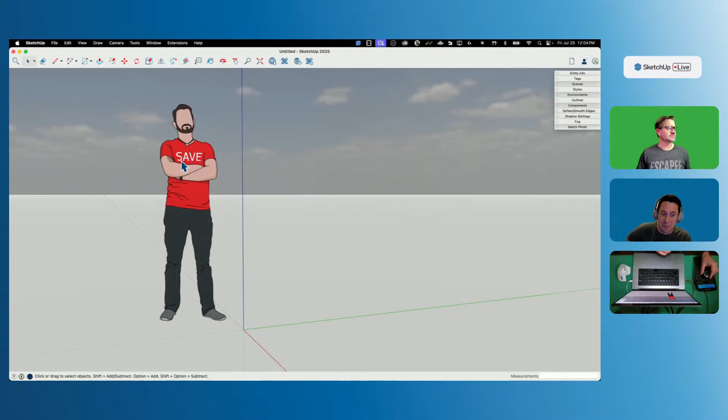Make sure I turn everything on so everybody can see. This question always comes up at the top of every modeling session: the mouse that Aaron is using, where we get all of our fancy camera work inside of SketchUp, is a 3D Connexion SpaceMouse. If you haven't seen them or tried them, go check them out because it's highly recommended with SketchUp. It makes modeling so much fun, unless you're just starting to use them like I am, and it makes modeling very frustrating. But apparently once you get used to them, they're great. There is an investment in time for sure. So to answer that question ahead of time, it's a 3D Connexion SpaceMouse. There you go.

All right, boy, we're talkative out here today. This is pretty nice. I know, it's so great. Can you explain renderings?

Rendering is when the computer simulates light to put it onto 3D modeled surfaces to make it look more lifelike. That would be my explanation of rendering. Which we are probably going to do today, right? Because Herbie is metal, we may or may not add some photoreal materials. Yeah, we'll definitely do that.

All right, so I'm going to bring in a couple of images that I got. The first one is an image I took at the movie theater when I saw this movie last night.

Speaking of which, if you guys have seen Fantastic Four already, because I know it's been out since yesterday, what'd you think? Let us know in the comments because we're going to talk about it. We're going to try to be spoiler free, try not to spoil it for anybody because it literally is like the opening weekend. I hate that, I hate it. In fact, that's why I go see movies I'm interested in so early, because I try to get ahead of the spoilers.

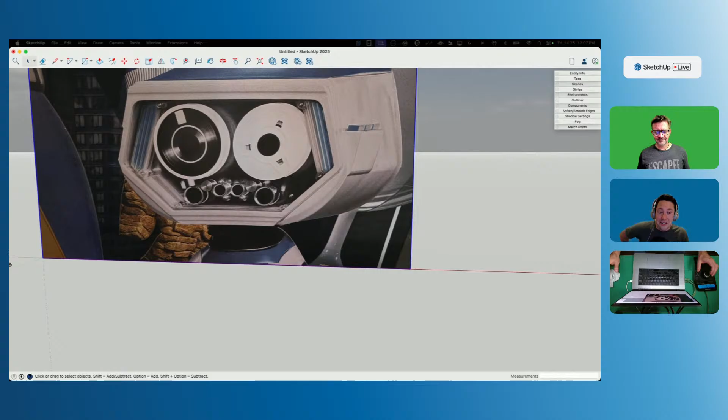Well, I think it's funny, especially with comic book movies, because I know people are not as geeky as me, so they probably haven't read the comic books or don't understand the implications of a lot of Easter eggs that they tend to put in comic book movies. True.

Oh man, Proton Man lost his foot in that one battle, but nobody knows who Proton Man is, so they don't care. Yeah, you got to get yourself a good movie buddy who's as geeky as you are, then you can go after that kind of stuff. It's like Mystery Science Theater 3000. Whenever I go out with geeky friends and watch movies, it's a grand old time.

So we looked at a couple things. I was originally thinking about the rocket, but it's actually pretty simple, some swooping shapes, but it wouldn't take hours to model. Donovan mentioned their car, and that would be much more than 2 hours, again lots of swooping shapes. The whole movie is set in this retro futuristic style with a heavy 50s vibe but super sci-fi stuff going on. Really cool, but there's not many straight surfaces, everything is rounded and curved.

Herbie's a good example of this. His face is flat, but the rest of his head kind of rounds all the corners and stuff like that. So it's gonna be cool, a fun little model. We're gonna hop in and get started with this.

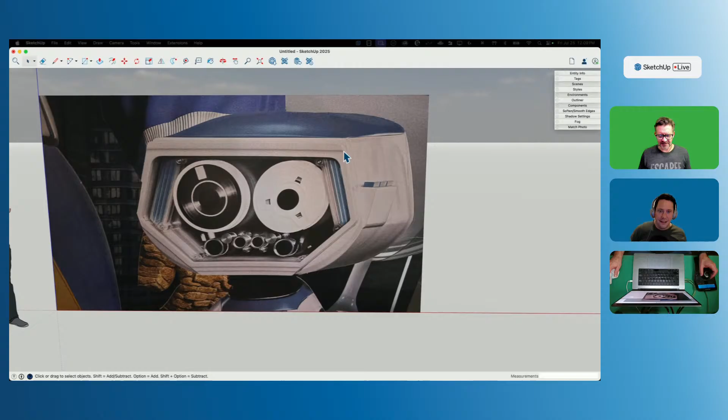I don't want to get too far down the rabbit hole into how he actually works, stuff they talk about in the movie. But what I really want to do is model three main pieces. This faceplate is on the outside of his head. This tape looking thing, like reel to reel inside, is actually a separate piece that sits inside. And the case of his head is another piece. If we have time, we'll do this little accordion joint down here for his neck, but those are the three main pieces I want to build out.

So I figured I'd start with this faceplate and set the scale and size, and then we'll work our way backwards to this reel-to-reel setup.

I'm glad I got this picture because it's a very good picture of what happened. So right here, this reel feeds under this piece, up over this, under this, to this, like that, and you can kind of see the tape right there. I thought that'll be a fun thing to model, how those pieces all go together.

Going to be some cool stuff. I don't have a whole lot of plans for a lot of extensions, I think most of this is going to be native, but we do have a couple curves that I might lean into, like the top of his head in particular. It kind of comes flat on these two corners and then bubbles up.

This is the danger of becoming a SketchUp modeler. I was watching the movie thinking, that's soap, skin, and bubble right there. That's just an extrusion, that's just a push pull. I was literally doing that during the movie in my head.

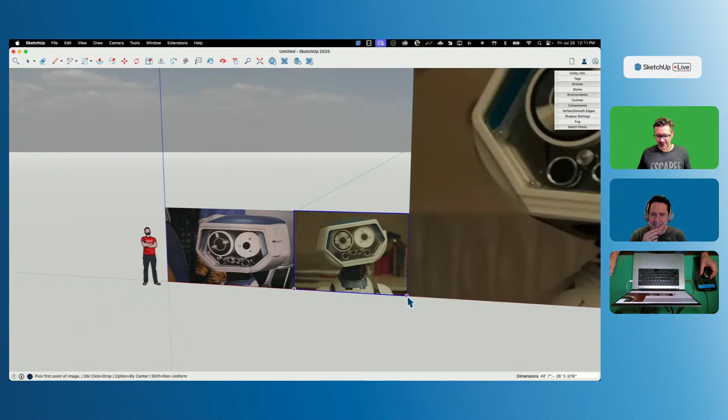We know that there are many people within the Hollywood complex that use SketchUp, so it makes me wonder, did somebody use SketchUp to create this? Because it's like an actual puppet, right? Yeah, he's all practical. Super cool for me. It does make me wonder if someone just so happened to have made Herbie in SketchUp and we're just reversing the process that they created before they made the movie. Who knows? If this hits anybody in the production crew downstream, let us know.

Kagi said Aaron never used to use materials, but now he uses PBR materials all the time because they're so good. But would he have started using materials more without PBR ones? Well, let me put it this way: y'all have been harassing me to use more materials for years, and I just started using them with 25. I think it's the reflectivity, as soon as that came in, I really started getting more into using that. So yeah, absolutely, 100%.

All right, so I want to start with, and I don't have a good flat shape, I don't have any technical drawings of this or anything like that, so I might be a little off on some of my sizes here. I want to come in and use this head right here as a reference, whoa, look at that. Boom, he is totally facing the camera perfectly, that's crazy. Find the middle of that, draw that down. Wow, that's pretty close to perfect too. A little weirded out.

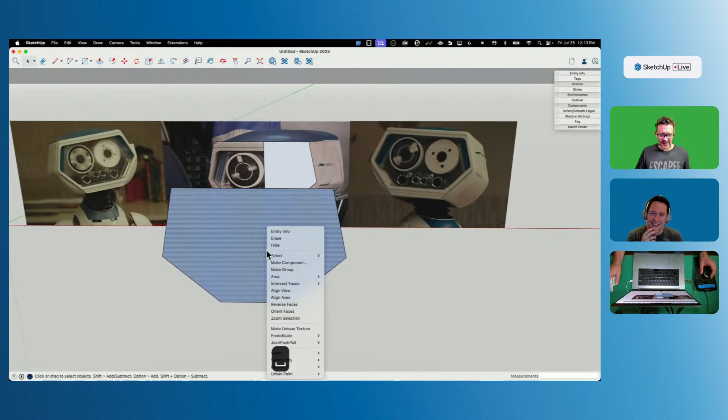All right, so that's about what his face looks like. That's the shape we'll go off of. If we look in here, this cover has multiple levels. Looks like I got it up here, drops down to a lip that sticks up, curves in, comes down here, steps down, steps down. Okay, so that's what we got going on there.

I'm just going to draw a couple reference lines on here for myself. Like that, and then up here goes up like that. I think that's the end of it. So we'll do this, it's that top lip. And then all of this is going to offset in something like that. I'm going to have some rounded corners on here.

I can see that this corner down here doesn't look rounded at all. This one has a small arc, and this one has a much bigger arc. So I'll do one like this, double click over here, then do a different, smaller arc here, and double click over here. All right, then we got that basic look now.

So I'm going to pull this first one out that far. This one's going to come out that far, and again this one's going to come out this far. If I want the same offset as here, I can select this face, hit push pull, and say come out from here to here. So I can use that offset as a reference right there, like that.

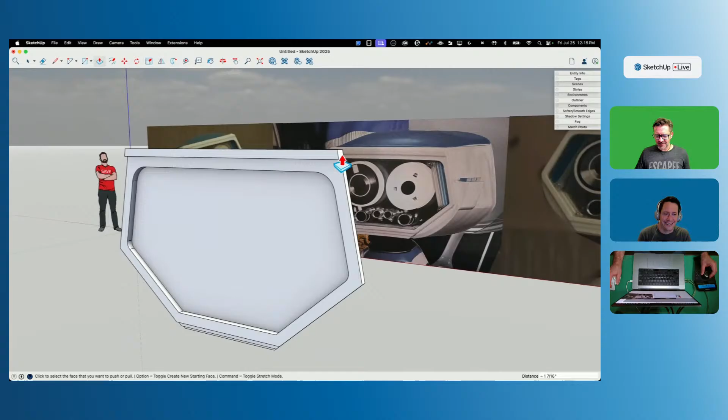All right, so this little lip that sticks up here, it is rounded off. So the outside corners are rounded here and here also, not quite as much. So I'm just going to come in here, double click like that, and then do the same thing.

Oh no. I'm never sure why sometimes I'm able to double click and sometimes not. Maybe it's because it's not flat. That's why. So if I do an offset like that on a flat piece, then it lets me double click on the next one and get the same offset.

All right, one more arc right here. What I was doing up there is I just found the end of that and came straight across, inferencing it right across. That way if I click there, go up there and get magenta, it's the same exact arc.

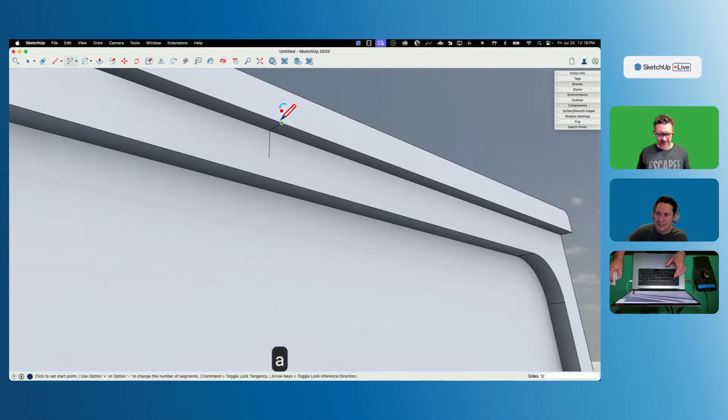I think I saw, I don't know if Ty's on. Ty asked me if we could model this ahead of time a little bit and then 3D print it beforehand, so we'd have a cool 3D print thing to show. I thought that was a cool idea, but this is the first time I've thought about how to model this, so that would be cool. I see Colin on, haven't seen Ty chime in yet. Ty, if you're here, say hi. I apologize to Ty for not getting back to him on that earlier, but as is indicative of my week, the reason I couldn't do it is because I didn't have the time.

All right, so I'm just running these long like this, and then I just have to chop this off at that angle. Whoops! I want to cut this off at the angle here. And this is just a straight angle like that, not a curve or anything.

So really all I should have to do is connect this point to this point. That'll give me a face right there. If I select that and say intersect face with model, that'll break the curve right there. So then all I have to do is select this and delete it. And there we go, we got a nice smooth.

You make it look so easy. It's my goal, try to find the easiest way to do stuff. Sometimes on those days that stuff doesn't go smoothly, that's me learning myself how there's a better way than what I'm doing.

Transom chimed in and said, 'We're making the interior millwork for a local restaurant and a bar in the shop.'

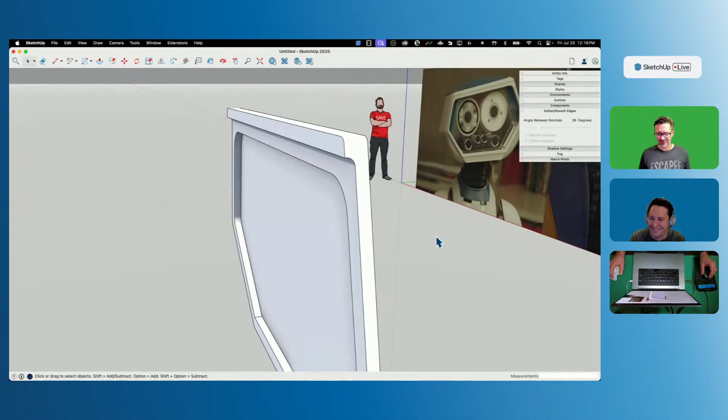Mike planned the whole project in SketchUp. I'm doing a lot of sanding. Ooh, sorry to hear that. He also said sanding's been bad. It's just not making fun.

Church fixtures too. Got a new CNC machine with a 5 foot by 10 foot bed. Oh my gosh, that is ginormous. That is a lot. All right, I got a thing I'm not happy about.

My offset - this is too thick. This bezel's too thick. It should be much thinner.

So I'm going to run around the outside like this, just pick each of these pieces that go around the edge. I'm just gonna do a quick offset, offset that, bring it down. That actually might be enough. Let's see. Back.

That's much closer. So it looks like these down here are supposed to be about the same size. So I definitely shorted myself here a little bit. So I'm thinking what I'll do is something like this.

Run this down just a little bit further like this. I promise I'm not going for perfection here, I'm just looking at my initial setup and not loving what I'm seeing. Oh, I gotta undo that too. Undo. All right, so I'm gonna take all of these guys.

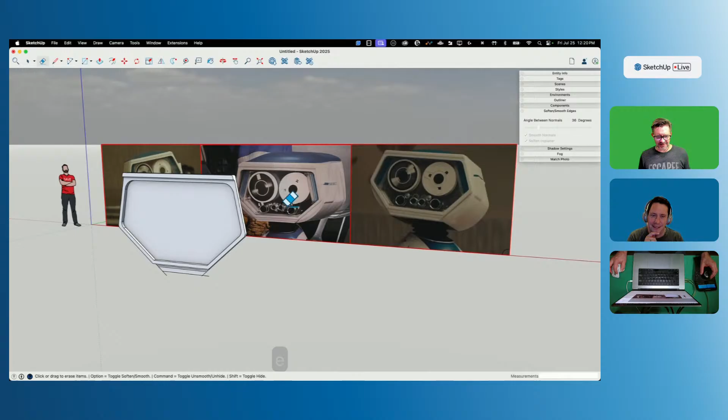What is that? I'm gonna make it a group. I'm gonna right click and lock it, that way I can't accidentally erase and get rid of it. Little time saver - I just erased that instead.

All right, looks like you didn't lock that part of the model in. Nope. All right, so get rid of that, get rid of these. Then what I really want is just this length right here. So what I can do is take this, put that here, put one here, and that way I can just run a line across like that, and then those are my steps down below.

And then for pulling this back up, this right here, if I take this and divide that into 3, then I know this one comes up to the second one, and this one will come up to that first one, and now that's evenly divided into the same size step. So that looks much closer to what we had there.

Cool, Randy says no disassemble. Hey, Johnny 5 would be a fun one to model too. Oh wait, you've never done that one before? Not like as of yet. That would seem like low hanging fruit for a SketchUp modeler to go in and do Johnny 5. That would be a fun one for sure. Well, I guess we know what to add to our recommendation list.

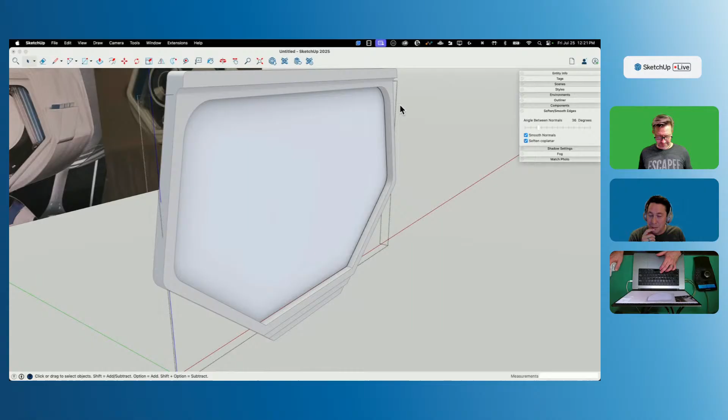All right, I'm gonna start getting some materials on here. That's right, we're doing it this early, guys. Glass. I just put a... So I grabbed this middle piece and made it its own piece, and then we'll take this piece out here and make it into its own group.

And one thing that's happening right now is my background is kind of bluish, so my ambient light that's coming in is kind of turning this kind of blue right here. I think I'm going to try to go with a more bright white, or maybe even a slightly orangish - see, these guys got a little bit of an orange or yellow tint to it.

So I'm going to real quickly just go to my environment - is there presets for 1970 sepia? No, but this one looks pretty close. Got a little bit of warmth right here, but it's definitely more yellow. The other one was pretty blue.

At this point, I'm not concerned about the background because I'm not going to use that. I'm just moving my colors off on the other screen. I'm not going to use the background, so one of the things I can do is go to edit, and I can just turn off the sky dome.

Now, all I'm really worried about is how that... You still get the reflectivity, which is cool. I still got the reflectivity on the glass, on that transparent part. So this looks pretty cool. I kind of like this. It gives me a little bit more warmth as opposed to that coolness. And I am intersecting. That looks pretty cool.

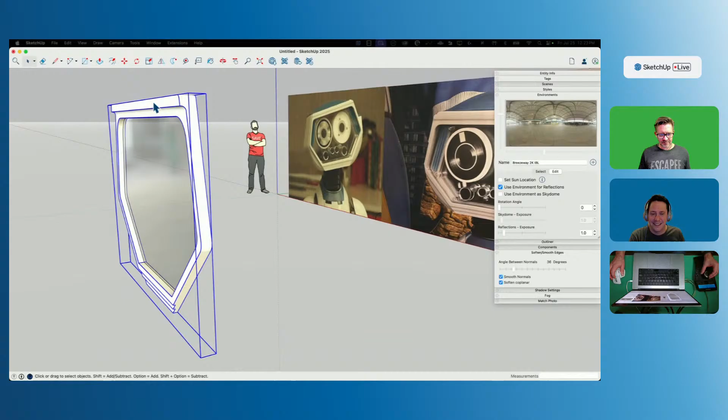So right now, this glass fits directly in here. I don't have to do this next part, but I'm gonna take that and I'm gonna scale it uniformly, just a teeny bit, just like that much.

And then I'm gonna take this because it should be a solid, and this should be a solid. That's not a solid. Let's see why it's not a solid real quick. Tools. Nope, tools, wrong one. Solid inspector.

Got a stray edge and a reverse face, so I'll fix both those. And then what I'm going to do is take this one and use tools, solid tools, trim. Trim says cut this out of another shape, but don't throw away the cutter. Subtract says take this out of this and then throw the cutter away along with the difference. By doing that, what I create is what I should have created.

Something didn't go right in there. Missing a piece or two. But yeah, it is a piece of glass, and then I want that to fit into the lip of the plastic here. But for some reason it didn't do that, and I don't know why.

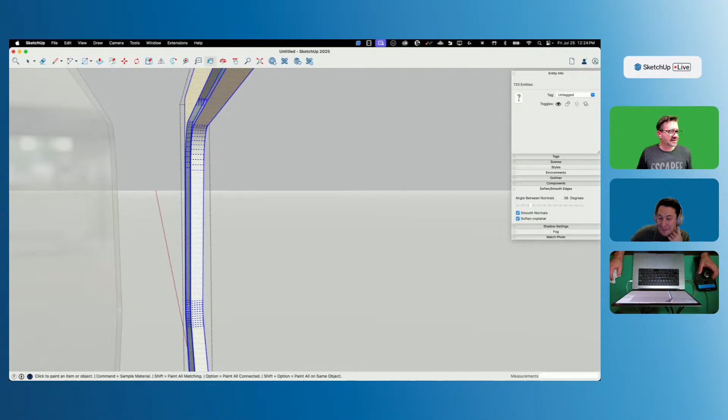I was about to ask why, Aaron. Why didn't it do it? But you just answered my comment. You don't know either. I don't know. Let's find out why. Oh, maybe it did. Oh, no, I'm sorry. It did. It just colored it clear. That's all.

All right. So now I can take that, put it back in there, click it right into place. And there we have Herbie's faceplate. Wow. So grab that, make that into its own group.

All right. Now this piece that sits behind, this is the part I'm most excited about, is doing this little reel-to-reel model. It's going to sit right behind this glass faceplate. So I can grab this face, Control C, and I can paste that.

And this will be the base that I'm going to build this all up onto. And then I'll just have that piece just fit right back behind here. Whether or not that's actually how it interacts in the real thing, I'm not really that worried. I know that that's how it will line up here.

So here's a question. If you copy and paste a component, does it turn that pasted object into a component, or does it make it unique? No, if you copy a component and make a new copy of it, that new copy will be a copy of the same component. So if you go in and edit one, it will edit the other.

Yes. So this, all I grabbed here was just a surface. So I cut it out of there. This is not part of a copy of any actual object, just a face. So I'm clear to mess this up as much as I want.

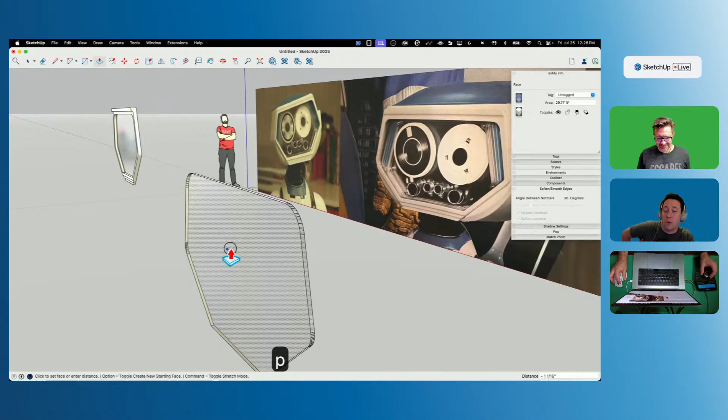But the reason why I asked is, if you put a different material on that, does it copy that material from your copy onto the original, or is the material unique? Yeah. There you go. Nope.

All right. So I'm going to do this background, and then I'm going to build everything up off of it. So I'm going to just give this a little bit of depth, just so I have a thing rather than just a face. And then I'm going to grab that and make it into a group. I want to group all this stuff together.

And then we got a couple things. So there's like an edge coming around here. You can see that has like these bolts going in, or nuts or screws or something going into it. So we'll do that. And then we have this little lip right here with a couple steps. We'll do that as well.

So let's start by grabbing this face again, Control C, coming out here, pasting it, and I'm going to put just white on here for right now. And I'm going to do a couple things.

One is I'm going to put this section here, go right there, go parallel to that, and then parallel to that. There we go. Draw that up like that. And then, to get that in the same spot, I'm just going to inference straight across to here, draw parallel to this. There we go, run that up like that. Get rid of those extra lines.

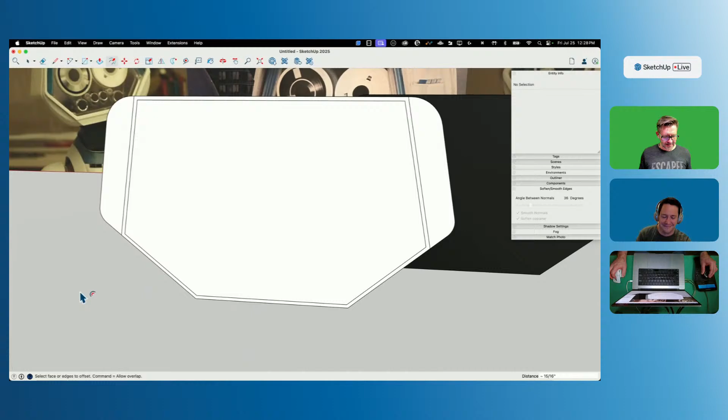And then I'll take this now and offset this ever so slightly. It's just a little lip. And then I'll come in here and I will put a circle like that big.

Actually, undo. I'm going to draw a circle, and I'm going to pay attention to what I put in. Let's say 1 inch. All right, there's a 1 inch circle. Perfect, because then I want to put that same circle right here, right here.

Like this. So that's what I want to get. I'm trying to create that plastic lip right there that goes all the way around. And then I'm just going to clean up those pieces that overlap.

Whoops, too much deleting. I think Randy gave us a suggestion on something to model. He says, how about some, I'm going to mispronounce it, Julius DeWall model trains?

Do you know what that is? I don't know what that is. I don't know what that is either. I can't say yes or no because I can look it up. Hold on, I'll throw this out to the crowd.

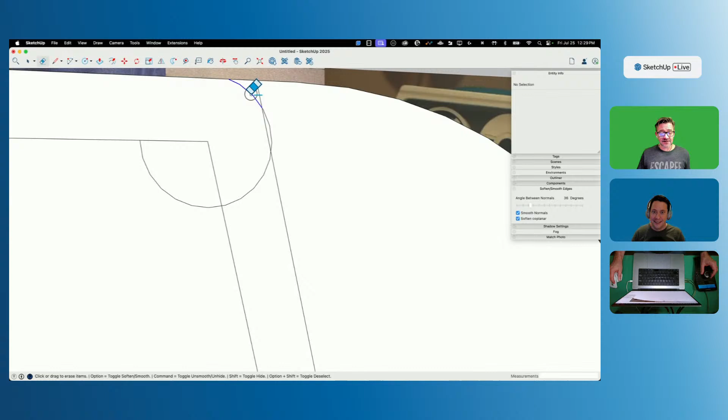It's been a bit, I'm going to tell you guys, I have seen quite a few movies the last couple weeks. I did see Superman when that came out. This week I saw both Eddington and Fantastic Four, both of which I thought were just great movies in very, very different ways. But what about you guys? Anybody seen any good movies recently that are worth checking out?

Okay, coming back to the comment before, the Julius DeWall model trains. If you Google it and look at images, I swear these were all done in SketchUp. The engineering - do they share the files? Can we just download them? And I know it, they look like SketchUp models. They really do. Wow, interesting, very very shiny trains. A lot of gold, a lot of silver. Very shiny.

That's fun. So let's expound on your comment earlier, Aaron. You saw them both, you liked them both for different reasons. You want to expound on that a little bit? Yeah, I thought they were both fun movies. I think an issue that's coming up - I don't want to get too high and mighty here, but let me tell you what's wrong with the comic book movie industry right now.

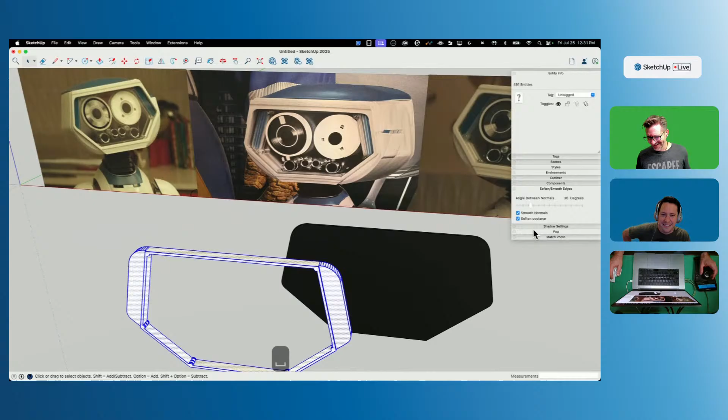Help solve it for us, Aaron. Let's get it, I get it. It's a multi-billion-dollar industry, and I understand that. But man, it's just the fun's gone. You know, it's all just so serious, and I am loving that both of these movies were just very, very fun movies. So I really like that. I liked that this was a good time. I had enjoyed both movies very, very much.

For different reasons, but they both were like, you know, I didn't have - it seems like the makers of these movies didn't worry about how grounded, how real is any of this stuff going to be. It's a comic book, you know. It's, and they did that, they just went, let's just have a fun comic book movie, and it was cool. It was a lot of fun. So yeah, I loved it, I thought it was amazing. Both of them, for very different movies, but both very, very fun for sure.

Bill says, well, the curves. Yeah, I didn't - I'm owning it, I didn't do that. Yeah, they'll, oh, that's kind of cool. It says that Randy's saying we're back on the trains. They come with design documents. That's pretty cool, that could be fun.

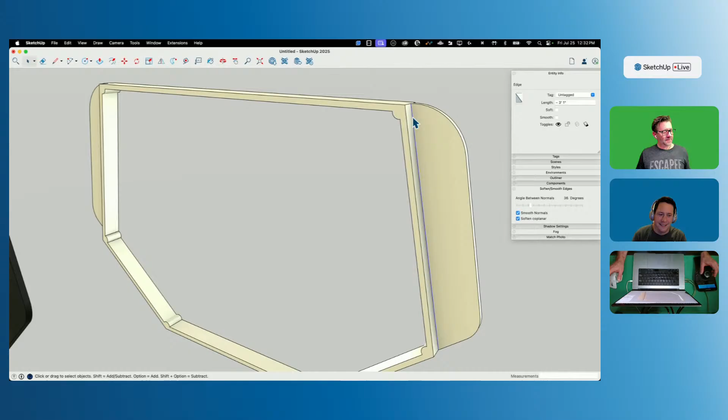All right, so here's my thought real quick. As I was just kind of modeling and talking, I'm going to take all of this and make it clear because that's kind of what happens in here. You can see that this clear plastic's in here - or not clear, and make it like this, which is like a 95% clear reflective surface. And then right here, they have kind of some material, a little bumpiness like right there, and then you can see it's see-through to a blue section behind it. These ones, you can't really get that detail.

I want to do something like that, get ribs on here, make it clear and put something blue behind. So what I'm going to do is take this line right here and go this way. We'll go from about here, option, up to here.

And I'm going to divide that, 1, 2, 3, 4, divide by 5. Yes, that's what I want. Then I'm going to get rid of my hanging over edges, and then I'm going to pull up.

Oh, something didn't quite hit. I think I got a little too fancy down here at the bottom. There we go. And then pull that up like that. Double click here, grab all that.

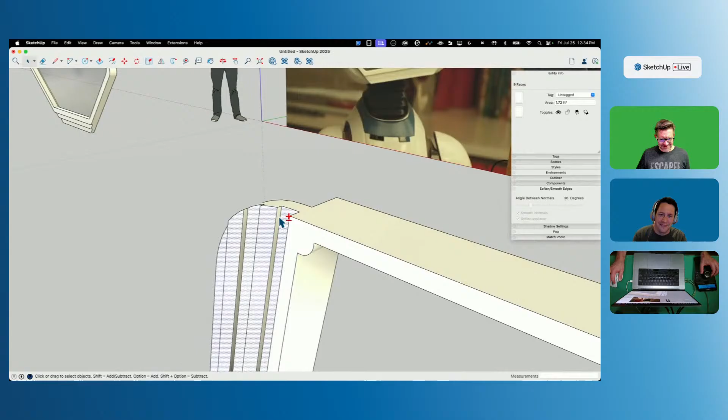So we're going to take all of that, and I'm going to mirror that, a copy of that, along the middle of this. Boom, that's over there. All right, now I'm going to take all of this and make that into a group.

And color that with the same material. All right, so they're going to have nice... oh, we came close. We got some not see-throughness here.

So what happened, interesting, is somewhere on the interior I have a material that's not see-through, so it just colored the front face. So what I can do is grab all of these and say what color do I want there. I think I can just do this.

No, I guess I can't. So what I might have to do instead is, I'm not sure, I'm playing with this right now. Oh, there. So if we look on the inside, you can see all these faces have that white.

So what I'm going to do is, I have the clear in my paint bucket, so I can just say I want to color this the clear, but I'm also going to say all the connected faces. Let's see if that's not better.

That's not better? It looks better. No? Still not seeing through. See what I'm saying? Oh, yeah.

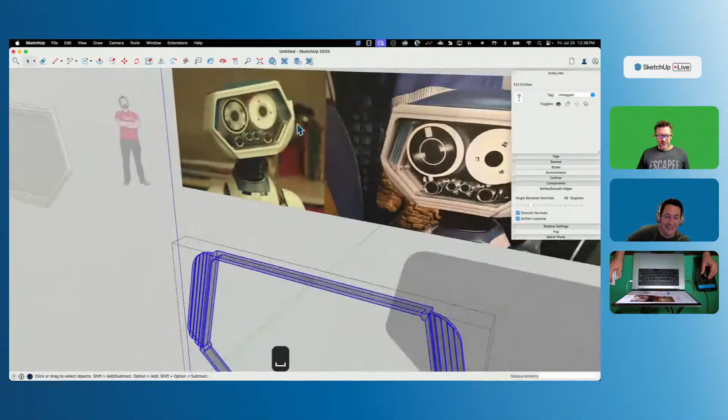Would the direction of the face have to do with that, or? Oh, I just had some. There we go, they weren't connected. The geometry over here didn't connect to the geometry over there.

Bill says trying to follow Aaron when he's on a roll is like herding cats. I'm sorry, yeah, I had to figure things out.

So I'm going to undo a whole bunch, I'm going to go back till it's all the way white. All right, so every face, regardless of the SketchUp model, every face has a front and back material.

So if I come in here right now and grab this material and say Command A to select all, and then just put that material on it, all it's doing is putting it on the outside face. So you can see right here, I can't see through this section.

So what has to happen is I have to get both the front and the back of all those faces to be clear.

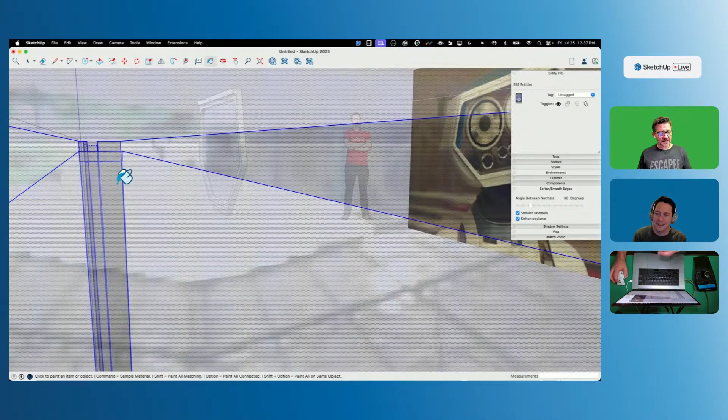With everything still selected, if I was to peek my head inside the material, scrolling in, eventually my head will pop through that surface into the lower surface. And now if I just put that on the inside, all the pieces will get that same clearness, and now it's all the way see-through.

Patrick says there's a few extra edges on the right-hand side that's not helping. Could be what? Do you have extra faces? Oh, you mean over here? This?

Top two, because I copied that over and didn't clean it up afterwards. I think I'm getting rid of geometry I need right now.

One of the downsides to working with clear materials is that they're see-through. Colin says, could you select all, reverse faces, paint, reverse faces, paint?

Let's undo, let's back this train up again. We're learning, everybody. Let me start by cleaning up. One step forward, two steps back. Here's the problem. I didn't grab the end pieces to close that up.

This is a fun one. Let's see if I grab these and just move that up to here. No, that's going to make a mess.

I guess the easiest thing is just to do this and stitch it. I'm not opposed to stitching, stitching's a good time. The way I did this, what I probably should have done is drawn a line here and here and just copy this whole wing from one side to the other. I didn't do that, so it's going to be a little bit of work to close this up properly. But then when I do that, I can get those on there. That's probably something that caused a problem.

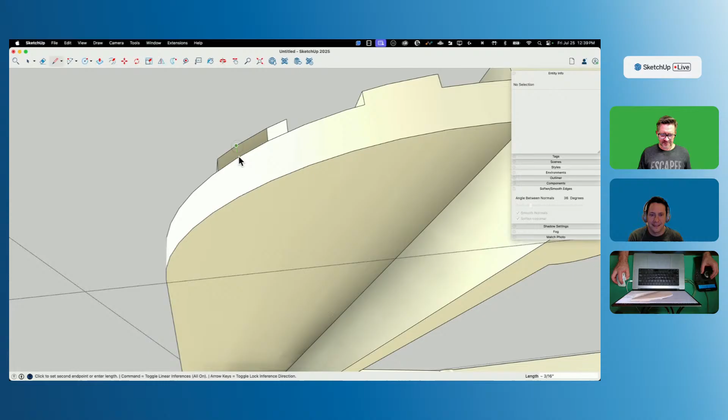Let's do exactly what Colin was saying. So it looks good all the way around. Command A—should probably save, right?

No, okay, I have to point this out. There was a comment about 20 minutes ago that somebody was like, save. And then somebody else responded like, don't kill the tension. You guys want a repeat of that horrible Notre Dame issue? I'm trying to find the comment because it was so great. What did he say? I thought you were on my team, y'all, but no, they were looking out for you. The comebacks were just too good.

All right, let's try this again. I'm gonna come in here, select all, color it. I'm gonna grab this and say color all. Now with everything still highlighted, I'm gonna say reverse faces. Boom, white outside. Color it.

Keggy said, don't spoil our fun. That's what he said. Keggy. All right, so there we go.

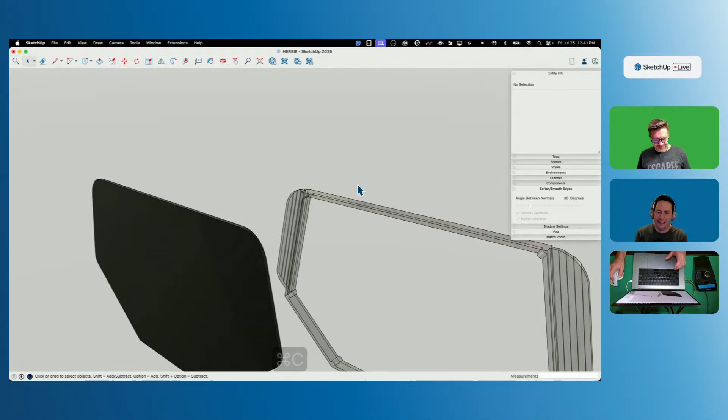So we got that. I am going to grab this piece and this piece, the back faces, and hit Command C to copy it. I'm gonna come out and say edit, paste in place.

I'm going to grab that and just slide it back here. And then I'm going to color it like a metallic blue, which is what I'm looking for.

I might go in here to my metals. There's not much—I mean he's really plasticky for the most part. I might grab my silver. Yeah, we'll start with silver, and I'll put silver on here.

And then come back here to this silver, and we'll just change that so it gets bluey. My daughter's ears just perked up somewhere. Bluey? You said the B word.

Yeah, all right, and then pull that up like that, and we'll do the same offset here. Select all of it.

And then we'll make that another group. So what I'm hoping for is we get a little bit of blue reflection behind that metal, so we get that multi-layer feeling going on there. I think that looks pretty cool.

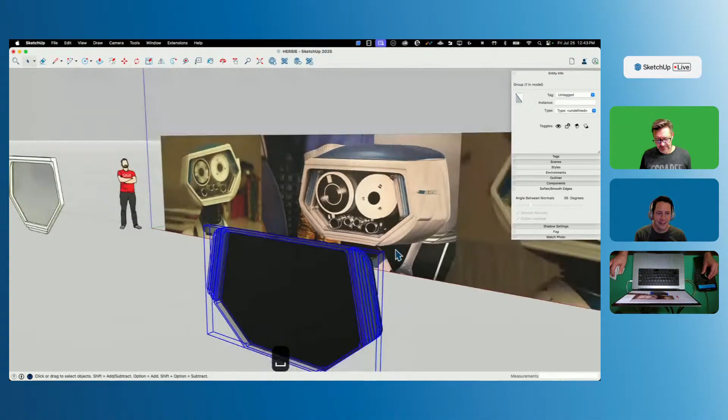Colin says you should have reversed it first. Now we're looking at the back faces, but it looks okay. He's not wrong. Okay, there, we're back outside. I got you, Colin, I hear you. I get it.

Just to see how this is going to look, I'm gonna take this, come in here, copy just this face, Command C. I'm gonna come back out, Command V, and then we'll line that up. This will be the beginnings of what is the rest of his head.

Make that into a group, and then I can grab all of these pieces, make that into a new group. Oh, so many groups. Don't be scared of groups though—groups are great, groups are the things you want to organize your model with. All right, so if we look at that.

Bill says, doesn't Aaron have a shortcut for paste in place? He uses it a lot. I used to.

I remapped a bunch of buttons on my 3D mouse because I noticed there were some commands I didn't use very often. So I put save and paint on there, and I think somehow—oh, measure, why do I have measure? I use measure. That's supposed to be paste in place. Yeah, I did used to have a shortcut for it. It was right here, but now it's not here.

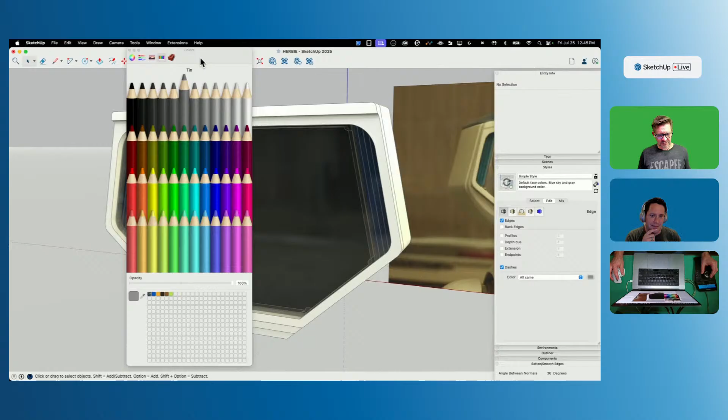I think my glass is a little too dark. The reflectivity's so cool, and I love the layers, you can see the layers in there, but I do think it's just a little bit too dark. So I'm gonna edit that real quick. Is it just an opacity issue?

It is 100% opaque, but it's very, very dark. You can see it's all the way to black. So if I lighten it up like that a little bit, wait, is that luminance? Is that what it's called? No, that's my background, that's the wrong thing. Oh.

Where's that material? Is that this? No, that's my blue, I know what that is. Oh, is it my default material? It is, okay. So let me take that material.

Bill says it looks like the windscreen of an American police cruiser.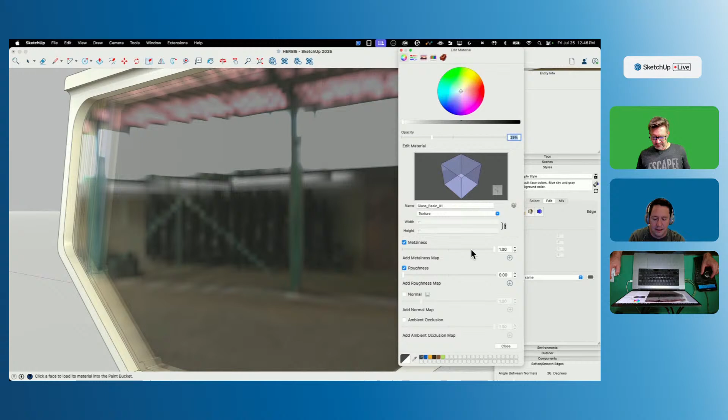There you go, so my opacity, if I set that down to 0, shows up like that. I bring it up just a little bit. That's a little too much reflection. 0 roughness, 100 metalness means it's totally reflective, so I could actually bring that down a little bit to let a little more light through. And yeah, this is just going to be a balancing act of getting the right amount of see-throughness to the right amount of reflectivity.

Ooh, Ty chimed in saying, love that reflection. Ty is here to answer your question from earlier. Hey Ty, yes.

Whoops, and then I screwed it all up. Okay. There we go, okay. Yeah, so let's get the most important part, his facial features, which are not actually face things, but these.

So we're gonna have a couple of circles, we're actually just 1, 2, 3, 4 circles, and then we'll do it twice.

So I'm just gonna come in here and start drawing on top, but I'm gonna do this. This is what I was saying, dealing with - there's a couple of colors that are hard to draw with. One is clear, one is black, but you can always come in here and go to View, Face Style, and turn it to monochrome. This just shows front faces and back faces, and that's it. So if you are dealing with see-through materials or very dark materials, you can come in here and draw on this and then apply materials afterwards. So that helps a lot.

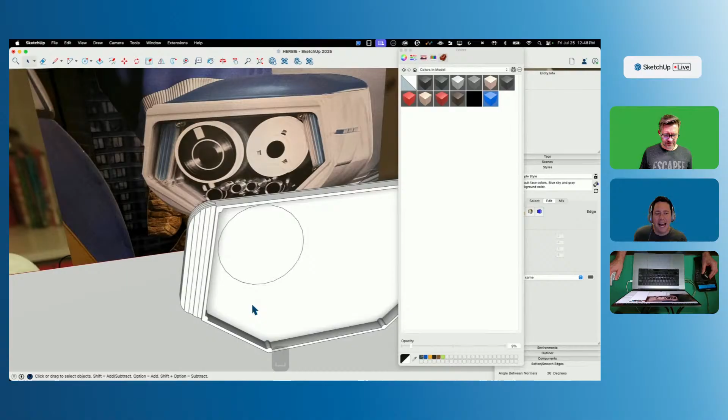He says, add some geometry on the inside so you can see through the glass, it will help setting the opacity. He didn't ask a question, I made it into a question. He said, add some geometry inside so that you can see through the glass, it will help setting the opacity. Oh, I think I see what he's saying. That's too big.

All right, so I'm just going to throw a couple of circles on here that are about the size I think they need to be, and then I'll move them around. That looks about right. Okay, I think that's going to work.

Patrick says, looks like the facial features are made up of reel-to-reel magnetic tape recorders. Did they talk about that in the movie? Yes, huh, it is, it's exactly what it is. It's basically a retro future cassette tape, you could think of it with data instead of music.

It's amazing what the 1950s thought the 2000s was going to be like.

Because these are so big and so prominent, I think this one in particular, I'm going to take up to like 48 sides. These guys are probably okay, they're smaller, but that one seemed like I needed to do that.

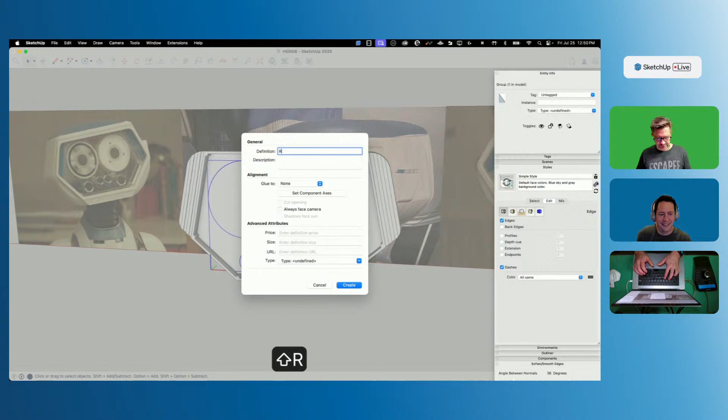All right, I'm going to grab these four, I should just be able to do this. There we go, I'm going to group that. Actually, I'm going to make that a component. And then I am going to reflect a copy of that about the middle and see how that works. Okay, so that's not quite right because these two should be closer together. I think these reels need to be a little bit bigger even.

So I'm going to come in here, start by taking this, slide it over so they're closer together. Actually, it's like these two both move over just a, whoa, I'm sure that was... and then they also kind of come down a little bit.

And then this just needs to get a little bit bigger. Not a lot, but... all right, there we go. Looks closer, it's getting there. All right, last thing, I'm just gonna move this over just a bit and then grab this one, bring it down just a touch. All right, that was closer.

All right, cool. So now each one of these I'm going to make into its own group. I could make these into components too, but it's kind of redundant since everything in the component is going to get created anyhow.

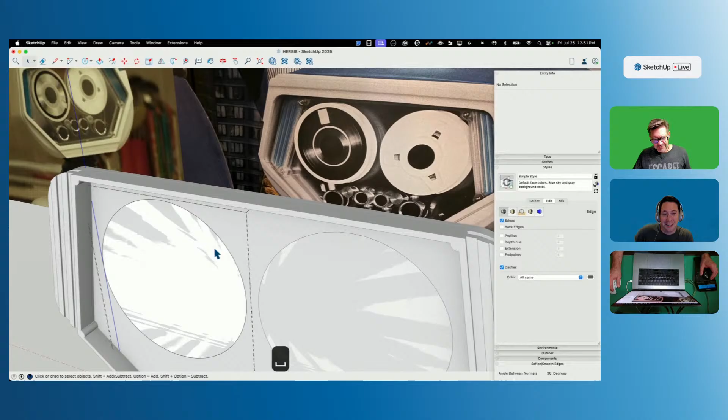So I'm curious, have you ever lost count of groups and components within groups and components in models? Not yet? Okay, it's always possible. It's always time.

So I'm going to option-copy, make the outside one side of the reel, and then the other one's going to come out here, and that'll be flush with the front. Perfect.

I'm making this more difficult on myself than I need to, so I'm trying to figure out how to back up a step right now. What I want to do, actually, here's what I'm going to do. I grab this, make it a group, and I'm going to hide it. And then on this group, I'm going to offset that much.

And then I will color this black. Oh, I'm modeling without colors right now. Yeah, because everything is monochrome, right? Right, but it is black now. So got that going for me.

I'm going to run that all the way. I'm going to view hidden objects, and that way I can pull this just to the back, like a good snap point. Like that—nope, that goes through. Okay, so I'm going to pull that out to the back here. There we go. And then in this front disc, I'm just going to cut a window and cut a hole. Yes, okay.

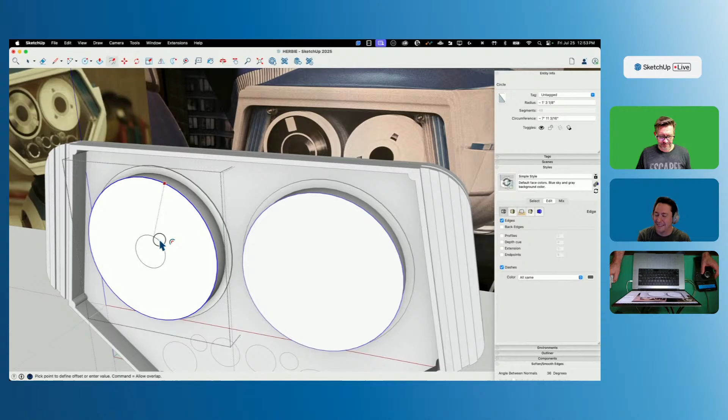Randy says, I've ended up with too many levels of groups and components and then spend forever double-clicking and trying to move in and out of them. Yes, yes, I do. I hear that. I definitely know what that's like.

All right, I'm gonna go and put some materials on here right now. I'm trying to be better about materials. I like when I get done with a model and it does have some cool looking materials on it. Yeah, that's it, I did it. Done, okay cool.

All right, I'm gonna edit. Aside from all that Z-fighting, it looks pretty cool. Oh yeah, that's coming, that's coming. I'm gonna unhide my disk on top, and then with this one, I'm gonna go offset. Oops, come in here, offset. Am I still on the outside? Yes, I am. Offset—jeez, let me say it over and over again.

So he's just got this little white rim. Oh, that looks like it's silver in that one. So also, we got metal, silver.

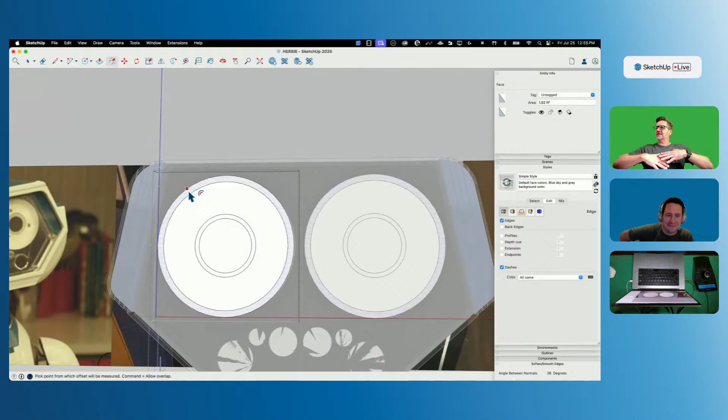The picture we got you took, is it of an actual model? No, it's a real picture of a life picture—a picture of a picture. Okay, because I was wondering when you saw this, were you walking around it trying to get all the angles, all the little details for modeling later? But no, I'm gonna admit something I did. It's like the cardboard standee, like a 3D box basically—it's a big picture frame, and the Fantastic Four standing in there, Herbie's down in the lower corner. I went in, I'm like, I'm gonna get a good picture. I got up close to my phone and clicked like that, and then I went like this to try to get the side—but you can't roll around a 2D image. That is fantastic. I did do that. So what you're saying is you're normal? What I'm saying is thank heavens I'm normal, yeah absolutely. And I just started laughing at myself, it was a good time.

All right, so there's the three rings. I think rather than going through and messing with some of this being see-through and some not, I'm probably just gonna—actually, I need to go one more because I missed a ring, this ring right here. I think I'm just gonna put materials directly onto the rings. So I'll keep white here, black, silver, white, silver, and then this ring should, I believe, just push through to the back and be see-through.

Keggy says, Aaron, that's an age thing, you're getting older, my friend. It's true, it's true. Happily, I'm growing smarter, more intelligent, stuff like that. So I keep telling myself it's okay for that reason.

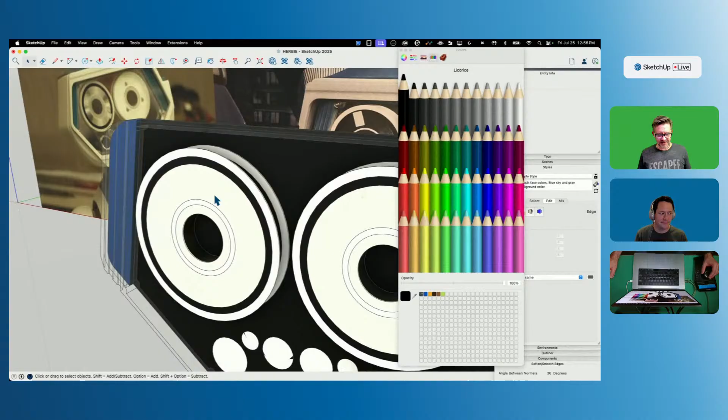All right, cool. Oh, I got to put this little box on here. I'm going to do this, going to go rectangle about the middle. I come straight down like this, and I'm going to...

Maybe drag this edge. Patrick's trying to give support and he says, we've all done it. I guess I'm just too quick to admit that I do things like that, really, is the main problem.

All right, there we go. All right, I think that one, I realize this eye is different, so I'll come back and do that later, but let me get the rest of this, and then I want to get that reel-to-reel tape on there. That'll be fun. So speaking of which, I want to make sure I have a groove to pass the tape over, so I'm just going to make those grooves kind of all the same. So I'm going to come in here, pull this up to this height, and then same thing here and same thing here.

And then I'm going to offset, so just like that, yes. These ones look like they... oh no, that's hard to tell. It kind of looks like these ones go in further. So I'm gonna do that, offset this the same amount, and then this one I'm gonna take way in like that.

And then I'm gonna pull this up to the bottom of this piece. Same with this, same with this. And then I will offset this back out to this piece.

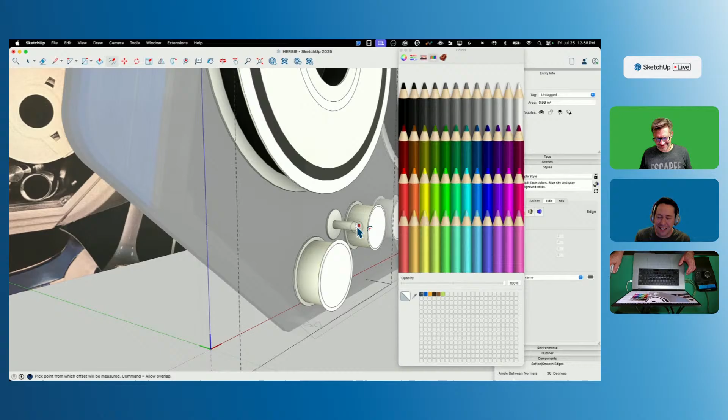Same with the offset. Transom says, I keep trying to pinch and zoom on magazines and newspapers. Oh, it's so true, it is so true. That's fantastic. Yeah, my iPad has ruined me for interacting with real media. There's so many fingerprints in my house on the TV when my kids go up and they're trying to touch it to select something. It's like, why won't it do it? That's because it's not a touch screen. It's not a touch screen. You can keep trying though.

All right, here's what I think I'm gonna do here. I'm gonna grab this, scale it down just a little bit, and then move it back. Move it in like this. Yes, do the same thing here. And then move it in like that. There we go. Get it like kind of indent.

And then I can put all of this... we'll get this silver. Except I'll put black here and here. Oh, he's coming together. Looks good. I mean, he looked good 5 minutes into this, and we're already over an hour, so it's looking... take good. All right.

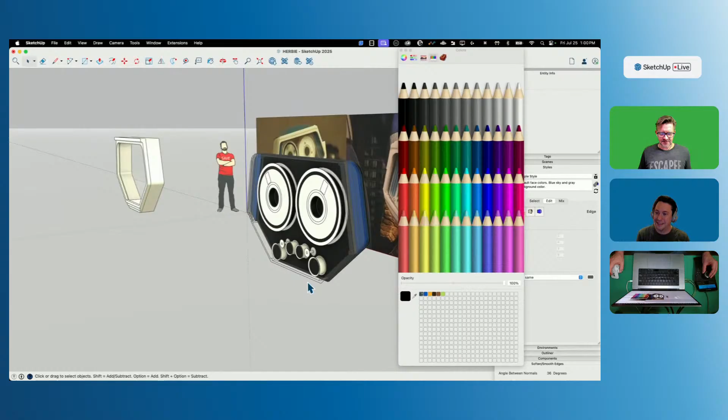So what I want to do now is I want to take this tape and wrap it up like that, over this, back down here, and connect in the middle.

I think the easiest way to do this is going to be to chop Herbie's face in half. Temporarily, I'm going to grab a section plane, throw it on the face like this, and then I will cut it back in here until I'm... there we go, in like that.

So I'm in the reels now, and now I'm just going to go grab a line, pull that down like that. Was that a question? Yes. Okay, I think that's right. I'm drawing segments, drawing around this segment like this. And then at some point, I'm going to come up... yep, to here. And then again, I'm just going to click around this circle's edges.

I could probably cut some of this material out and dissect these arcs and pull them where I need them, but I don't. I think it's just quicker for me right at this point just to do this because it's not really that complicated of geometry. Let's go to there.

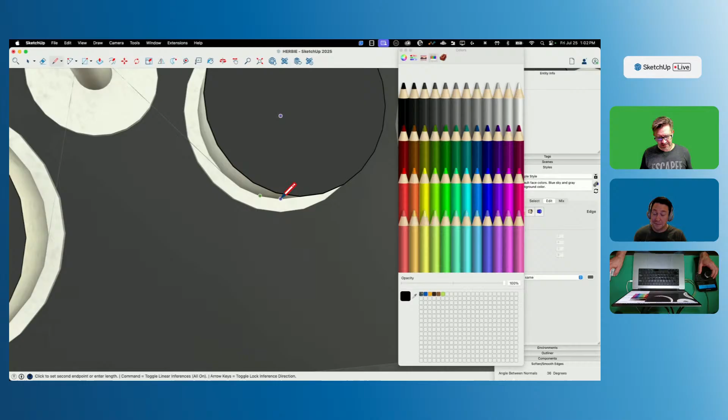Whoops. Sometimes I start talking and clicking becomes a secondary action and I forget. All right, so I'm going to take that over here. I'm going to figure out where the midpoint between these two pieces is like this, and that's where I'm going to end that piece.

All right, now I'm going to triple click to get all of that line.

Kegi says, I have voice control for some of the functions in my car, but the other weekend I had a loaner car while mine was in the garage, and I spent about a good 10 minutes shouting at the loaner car. Isn't it rude when they just don't listen?

All right, here's what I'm going to do. I don't have this extension, I don't. Is it under tools? I want to use a DBO's push line. I don't have it, so I'm going to go grab it. I'm going to install an extension live and use it. Crazy thing, but I know this extension pretty well. Push line right here. Grab that. Not push pull, push line.

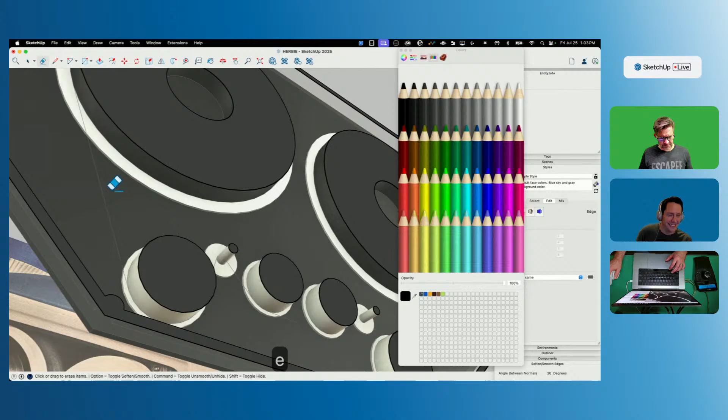Oh, I see what it does. Yes, nice. This is an amazing little extension that, especially in something like this, where I have a series of edges, I want to just take these all and pull them up into 3D space. It's super easy, so I can just grab this. Hold on, I don't like this first line. That would be a great native tool - nudge, nudge, hint, hint, wink, wink. You nudge away, you have as much control over that as I do. I'm going to weld that back together, and then I am going to find that extension, a DBO push line. I'll grab that.

Okay, let me do this. Make group, let's go into this group and get rid of everything else. Okay, now I want to take that. I'm just going to pull that straight out on the green. I don't know exactly how far I pull it out, so I'm going to pull it out a little bit, and then I'll fix it up as we go.

Grab all that. So can you go off axis with push line? Maybe, wow, I don't know honestly. There we go, so there's our tape. I'll take care of that Z fighting in a second or two. Man, that looks good, that is so cool. Pretty cool. Get rid of this. Oh man, it's pretty close.

So I'll just go ahead and scale that up to. Why are you not snapping? Snap to my thingy, snap to. All right, there we go. And then I will grab that, and I will mirror again.

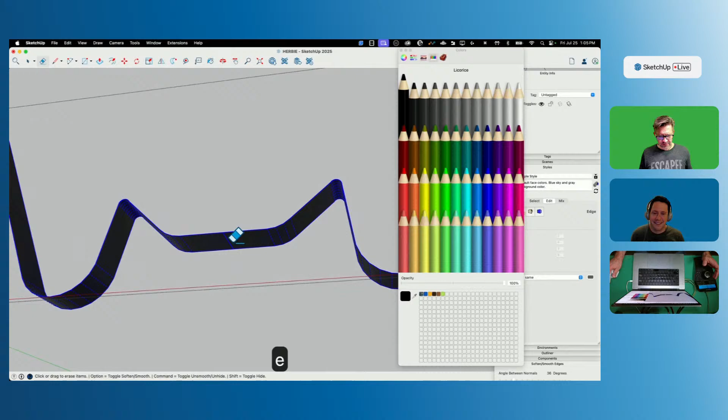Every once in a while, if you're like me, you look at your modeling process and you go, oh, have I changed my process in forever? Sometimes I feel like I do the same thing all the time over and over again. But every once in a while I look at it and I'm like, oh yeah, I added this to this, I added this, I added that. So every once in a while I do something new.

All right, so there's - is there a celluloid material in the warehouse that we can put on that film strip? Possibly, it is pretty dark though. Look right here, it's really got like no reflection, totally matte black.

So, ooh, Bill is testing me. He says okay, where does nudge, nudge, wink, wink come from, and what UK chocolate bar did an advert refer to it? I know the answer to the first one, which is Monty Python's Flying Circus, Eric Idle's skit with the guy on the bench. The second part I don't know, because I am not familiar with UK chocolate bars. Oh, just let us all down, Donovan. I know, I would just say Willy Wonka, because wasn't that originally British, Roald Dahl? I don't know if that's the thing. That would be a good guess, right? I'm talking stuff, I don't know what is going on.

All right, I'm gonna take all of these and give it a little bit of depth, so I get rid of that Z fighting. So after downloading that extension, it turns out I'm just gonna do a push pull anyhow. So all that work - yeah, but it was cool, I showed you how to do that thing.

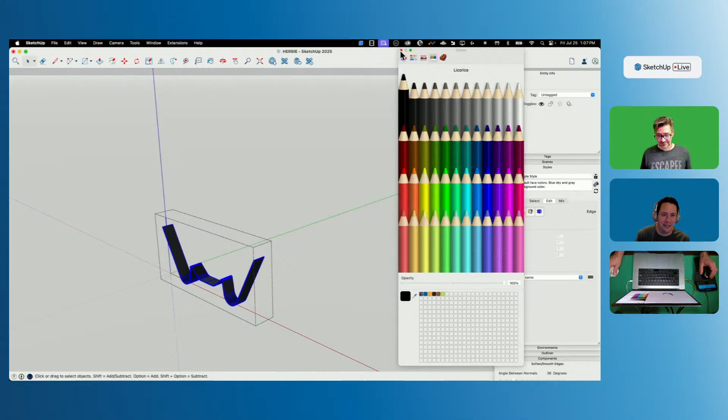Yeah, I mean besides the reverse face paint, I also need something else I need to try, which is what is it? Line pull? Is that the name of it? Push line, push line. Yeah, a great extension, and like I said, super simple, but a great way to get 2D geometry into 3D space.

Let's push that back there. Not that much. Keggy says, careful with that cellulose, that could be flammable, and Aaron's modeling is hot right now.

Boom, all right, so there's other details in here. There's screw heads, and there's these little readers or whatever extra things around. But I'm going to call it right here because I want to get the rest of his head done too, and we got like 45 minutes left. So that's looking pretty cool, it's looking cool, I like it. That is cool, I like the way that looks. So I'm going to go drop this, pull back, give myself a little bit of space. Yes.

Okay, this piece right here is what's going to expand into his larger face. So there's that lip, and then this next piece comes out, and it has a bit of a different shape. Looks like it goes down below his chin, and then kind of comes out round here and here. So I'm going to do that.

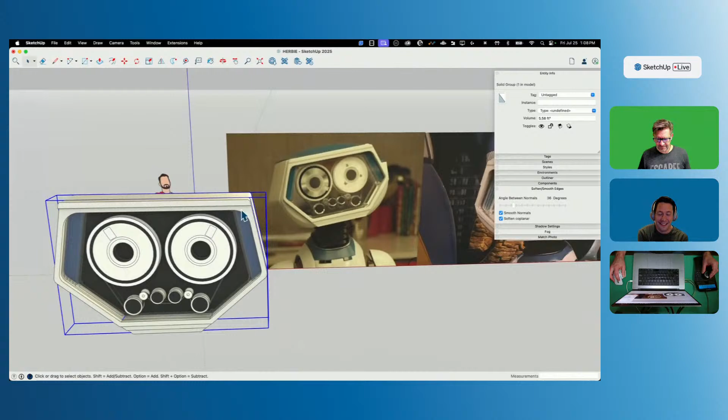I'm going to grab this, unhide everything else. So what I really want to do is, well, let me back up a bit.

Vincent on LinkedIn says, 'Dad joke, what's his operating system?' referring to Herbie. 'Fantastic Fortran.' Nice, who here remembers Fortran? I don't get it, I'm assuming Fortran is an operating system of some kind. It was, or not an operating system, it's actually a, what would you call it, a programming language, but still a good reference.

All right, so I think what we got here, if I look right here, it looks like this is actually a gap. I thought this was actually wider, but I think this is a gap between the two. So I'm going to do that real quick. I'm going to push this back, and then actually go here.

I'm going to pull this back this way, about that much. I'm going to offset this about that much, and then push this up to the face, and there we go. Now this is going to become our new outline, and this is the piece that's going to get those jowly shapes. So I'm going to go.

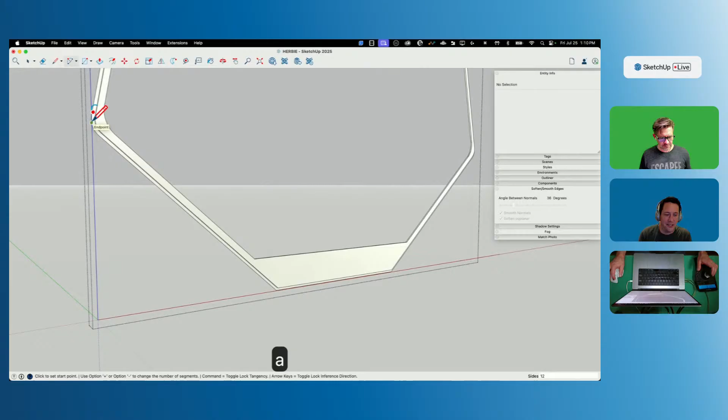Studio RT Cool says, 'I took Fortran in college on punch cards.' Yeah, sounds right. Randy expounded saying Fortran means formula translator language, formula translator, Fortran. Sounds right. I just remember the first software I worked on was Fortran, and it was limiting as far as what it could do. I did not program in it, that's not me, but I have familiarity with that term. I guess I know the name more than anything. So, oh yeah, Fortran.

All right, so that gives us our little things here. It looks like what we got is two different pieces. This is the outside one, which steps back, okay cool. So we got this, which is pretty cool, so that's gonna, whoa.

Hey, settle down, Herbie. All right, so let's go back like that far. And then what we're gonna do is we're gonna have this little, yeah, so from here up to here, we're gonna have a bit of a rounded section. So I'm going to try to do that.

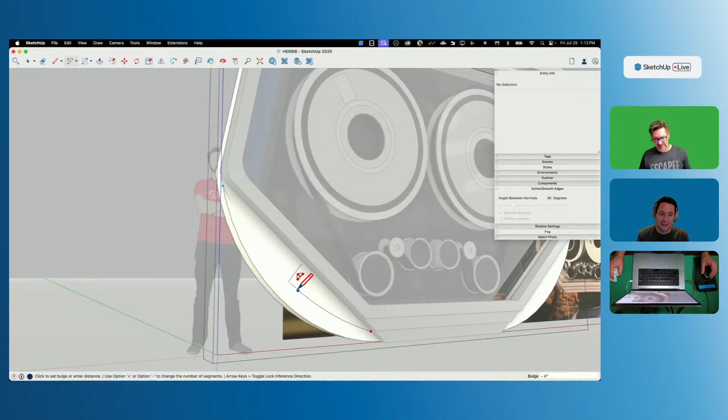I'm going to grab another arc and go from here, to about here. Why is that going out of plane? Like that? No, it's a little bigger than that. Here to here, like about there. Okay, something like that.

And now what I'm going to do is take this edge right here, connect this to this right now. I'm going to take this. Here's what I should do: I should cut this at the middle. I'll take that and just drag it straight downwards.

See what that did? Okay, that didn't do what I wanted it to do. Some of it worked, but I don't think this intersected. What did this, you didn't want intersect, right? What did you want it to look like? What I did, I did this wrong. Okay, I know what I got to do. So what I'm trying to do is figure out what to do as I'm talking, and that doesn't always work out well. Sometimes the brain and the words don't line up.

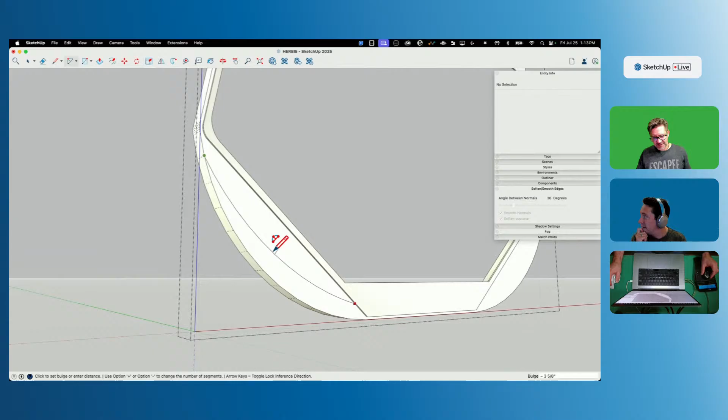So what I got to do is go from here down to, let's toggle everything else off, about here. That's why I was having a weird time with that arc, like that. And then I'm going to connect this to this. All right, I'm going to grab this piece right here and see what happens if I drag that straight.

Huh, it's kind of weird. Why did it do that? Grab it here. Oh, I was grabbing the whole thing. Okay, there we go, that's what I wanted. Oh, like a bevel. Yeah, okay.

All right, so I cut a little bit of a corner down here, literally. Go straight across like that, and go stitch that back up.

People are sounding off in the comments about their experiences with early programming languages. It was fun. It was fun.

All right, there we go. Cool. So then I'll take that whole thing, get rid of this whole thing. There we go.

That'll work. Mirror that. Option, center this. Get that on that side too. There we go. Got that little lip down there. Got this.

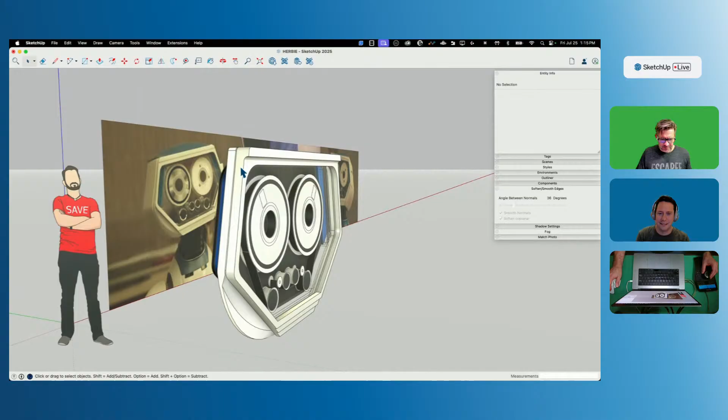All right, something did not close up here, so let's force it closed. Now triple click, re-smooth it all.

Oh, it's coming together. It is coming together. Honestly, you could just stop here and it would look great. But it's so hot, I'm just sweating over here. You're modeling so hard, you're working up a sweat.

All right, so what happened here? For some reason this got smoothed or deleted or something. Same thing here. I just want to pull this back so that that is continuous around there.

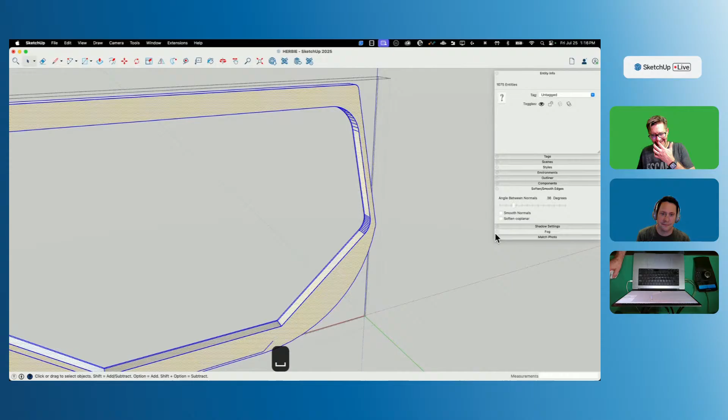Cool, get that outside of the head in. The back, again, paying attention to things that nobody really needs to pay attention to whilst watching this movie. The back of his head has like an access plate with vents and some stickers and stuff, but we're not going there. I'm gonna grab this face again, Command C, edit, paste in place, and then we'll scoot it back to give us the same offset there.

Offset that out like that. We'll push this back up again. We'll give ourselves basically the same lip we had before, but I'm just going to bring this, give this guy a decent solid head like that.

All right, there we go. Not that the back of his head wasn't cool. It was very, very fun details going on back there, but I did not find a picture of that, and when I went around the cardboard cutout, I couldn't see the back of his head there either. So, all right.

So there is the beginnings of the rest. So like I said, the details that I got to get in now, we have this little thing on the side sticking out, and then we have that soap skin and bubble top that I want to put on. And then we're down to like maybe a little bit of accordion neck, and we're closing in.

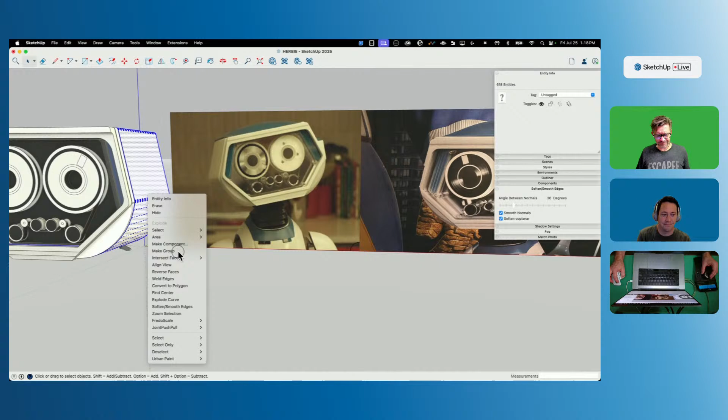All right, let's take this and make it a group, and then this looks like it goes pretty. Oh, I got to do this other eye too. I got to fix that. I got to hop back in and put the right detail on there.

I'm gonna touch, hold on. Let me back up and go into my in-house material, in model materials. I feel like some of these materials, for whatever reason, my silver roughness was, the metalness was turned off, so I wasn't getting these sweet reflections I was hoping for.

Patrick says, Aaron, tell me you enjoyed the film, or was it just research for the SketchUp live session? Can it be both? No, I thoroughly enjoyed it. I loved it. I have mentioned it before. I am very much a Marvel fan, been a comic book reader since always, and yeah, I really do enjoy most MCU movies, even when people harass them and say that things aren't good movies. I go just because it's a fun thing to watch, kind of thing, more than anything else.

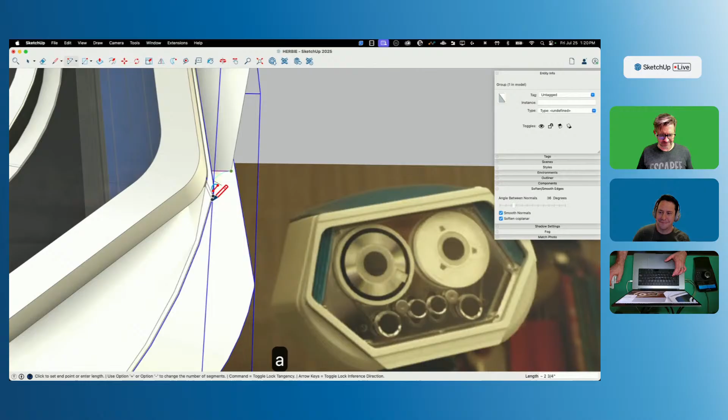Yeah, I really liked it. So if you like those kinds of movies, I would say you'll probably enjoy it. If you don't like superhero movies, I'm not going to suggest you go, but it did not fall in line with like a lot of recent superhero movies.

So you said that Fantastic Four was very similar to Superman, sort of. What do you mean by that? In terms of like tone? Yeah, in the fact that like I said, I feel like both of them decided that it was time to have fun and not get all worked up and like making sure it ties into the larger universe or anything like that. It was just enjoyable, fun, popcorn eating movie.

It was good like that. It's a popcorn eating movie, as long as you don't buy the $80 commemorative Galactus head bucket. That popcorn bucket is awesome looking. It's like this big, but it's $80.

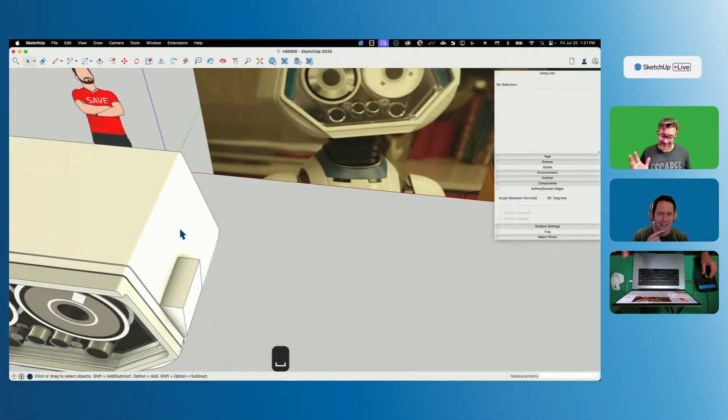It's funny how popcorn bucket culture has exploded in the last, what, two years? Three years? Something like that. It is pretty amazing. I don't know the reason for it.

I don't know if you guys know, but a lot of... hold on, 2x, can't talk and type. Nope, divide by two. There we go.

A lot of theaters make money off of what they sell from the concession stand, not the movie itself. The franchise makes the money off the movie, because they have to split the ticket price with the distributor. So if you go to see a movie, if you can buy popcorn or a beer or whatever, it helps the theater itself as opposed to just Regal or AMC. So same with those popcorn buckets.

I think that's why those are getting pushed so much, is because they need that money. Popcorn costs nothing, but if you can sell something that you bought for 40 cents for $25, that's a good way to do it. Yeah, it is.

Ty says we should do that as a future live stream, design your own popcorn bucket challenge. I thought he was saying I should sell popcorn and keep the profits. I like that plan too.

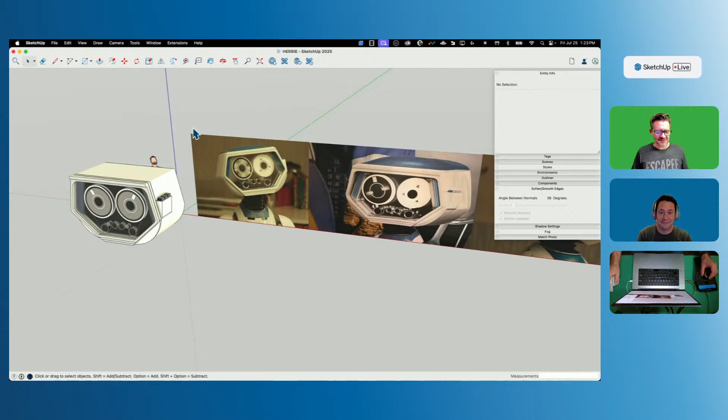All right, make that into a group, cut it, come into context here, grab this, make into a group, edit, paste. Well, when I get done with this, in just a few minutes, he says optimistically, we'll go into the outliner and just see how deep I went with my stuff.

So this side of the head has nothing on it. Are you talking about all of the groups and components? Gotcha, see how far in I went. Yeah, so it's a little deeper.

All right, so what I want to do now is create a rectangle that goes past the edge significantly, like that. All right, this, make this a group.

I'm going to color it with my blue. Where'd my blue go? That's not my blue. Oh, for heaven's sakes. There we go, there's my blue.

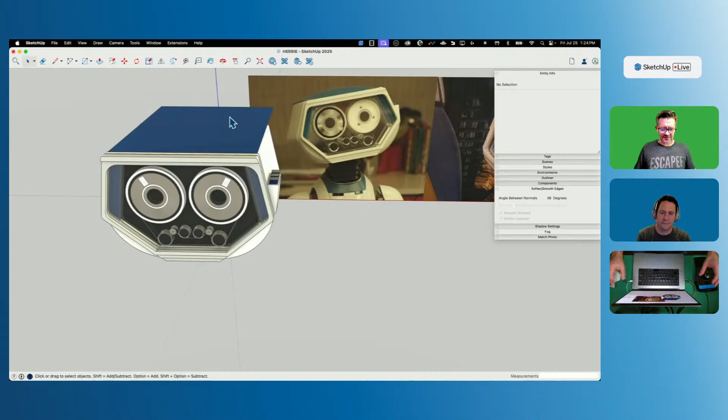And then I'm going to use soap, skin, and bubble on this and try to get... I don't have a very good look at this, but it's pinned down all the way across here, it's flat, and then it bubbles up in the middle and comes down to this edge over here. I was like, it just looks so much like soap, skin, and bubble, so I want to see if this works.

So we're going to grab this, I'm going to go to extensions. Oh, I think I turned it off. Hold up, let's see. There it is, yep, turn it back on. Apply changes, there we go. All right, so we'll skin this thing.

No, we'll get a little finer than that, maybe 20. Speaking of soap, skin, and bubble, if you haven't seen it, Aaron put out a fantastic tutorial on our YouTube channel about the different extensions and different ways that you can do more organic surfaces.

I think it's called... what is it called? Patio Sunshade Showdown, yeah, that's it. Which was funny because somebody came on and said, I install sunshades all the time, and that's nothing like what they look like. It's like, okay, well...

A sail hanging from the sky, a sheet on poles. I don't know, the point is supposed to be the geometry, but they were very serious about their trade, and I apologize, I was not trying to make fun.

All right, so I'm going to take this now, and I'm going to add pressure to it, make it bubble. Let's try 10, see what happens there. So we got a little bit of a bubble out of 10.

So all I did there, I should back up, while Donovan was talking, I took that shape and subdivided it into 20 by 20 squares roughly, and now I'm adding pressure to it to cause it to bubble up. So let's try going 20, a little more, okay, I'm going to jump up to 40. Ooh, that might be it.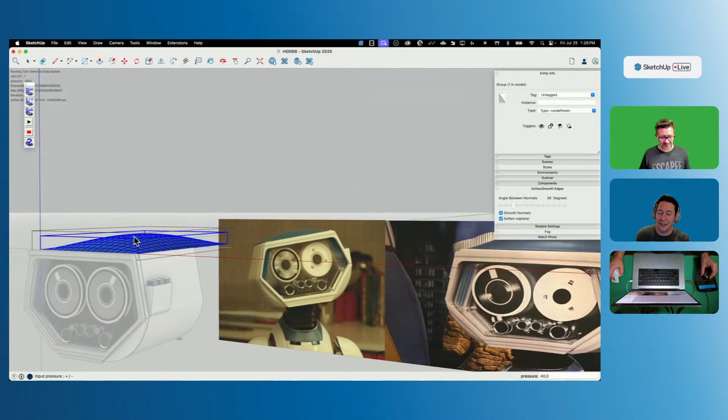So I ran it long like this because I want to cut it off at the back of his head, because that's actually what happens. But that looks pretty close. I was waiting for the reasoning, but there it is. Just a touch, I'm going to split the difference. 45.

All right, that's it. Boom. If I come in here, I'm just going to grab all that, delete it. And then I will draw an edge here to here.

Oh, I thought that would close. Why wouldn't it close? Reasons, things, okay, stuff happens. It's possible that when it blew up like that, it didn't come out perfectly, it came out of plane a little. So I don't know, sometimes I just don't know, and when I don't know things, sometimes I try to find reasons. Yeah, so you can see there as it came up, it's just slightly out of plane, it slightly came off like that.

Not a big deal, because all I got to do is explode this. I'll grab this and say intersect face with model, and that will break both those faces. So I can come in here, well, let's see, this is probably easier to do this, get rid of these extra edges.

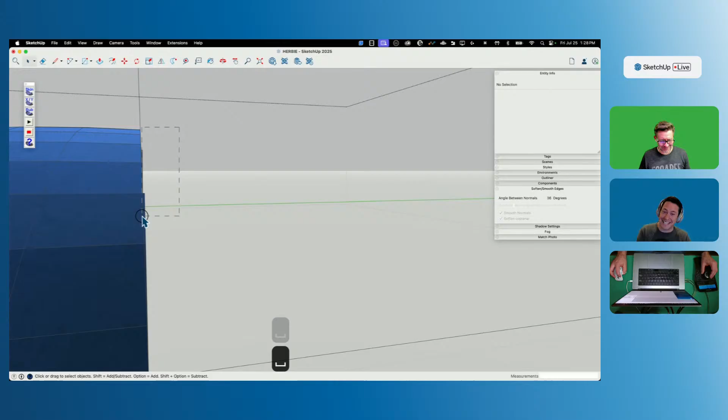Tedious, oh man, they're just so small. Try to do this without deleting any of the extra faces that you actually need. It's going to go all the way down to 0 at the end, so when it hits down here, it'll be all the way at the face.

I notice that if I get my head closer, then it's easier to zoom in, just pinch and zoom on the screen. That'll fix it. All right, there we go, we're getting close.

I got a couple more edges to clean up right here. But Herbie's almost there, Herbie's almost there. All right, there we go. That's all right, nice. And I don't want that grid on there, but that's easy enough, I just come in here and I'll soften and smooth that. There we go, very nice.

So I got a little Z fighting here. Did I just delete that? Yeah, I think you just deleted the angle. Option, soften, does that help at all? A little bit. I'll probably just merge these two together, so I'll come in here, get rid of that.

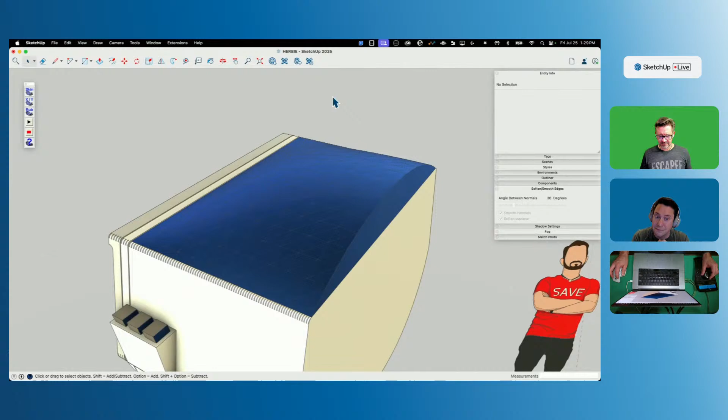Oh, looks sweet. All right, let me fix this eye. We got half an hour left. I'm gonna very slowly come in here and fix this eye. No, I'm just kidding.

Oh, I can't click right here. Look, if I click right here, I get this glass piece that's in the front. That's silly. So let's see, how do I do this? I guess I'll have to temporarily hide this to get into the face.

All right, so I'm going to grab, these were components, we made 2 components. I'm going to grab one of them, make them unique. That way I can come in here and go in on this and get rid of these extra edges. So make that all into one piece, color it with my white material.

And then get this design on here, so it looks like I got something all the way in here like this. And maybe a little bit of a rim like that, and then something out further like that.

That's too far. I'm drawing a line now, that's not what I want to do. Offset. Well, weekend setting in, guys. So what I'm going to do is I'm going to do something like this.

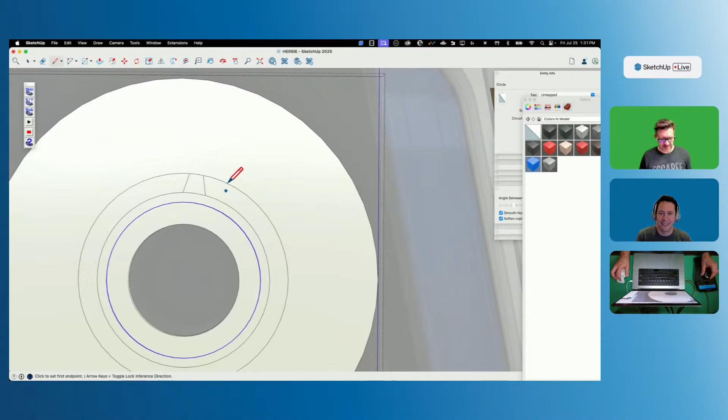To get that little triangle shape I saw right there. Is that like a hole? I think so, I'm going to make it a hole. And then I don't see the details that you're seeing because everything is compressed into a small little screen.

Well, so yeah, I mean that's what we're working off of, so we're not looking at... Oh, there we go, so it looks like we actually have a little bit of an offset. Okay, yeah, so that's good.

So I'll start with this, and I will grab that, and then I'm gonna rotate a copy of it 120 degrees, 2X. Didn't break the face. Why? Oh, that's fun. No.

Okay, I'm not going to mess anymore. I'm just going to grab these edges, click on them and bring them out. They're somewhat connected because they're breaking the geometry and pulling it out like that, but they're only connected back at the circle. So that's kind of interesting.

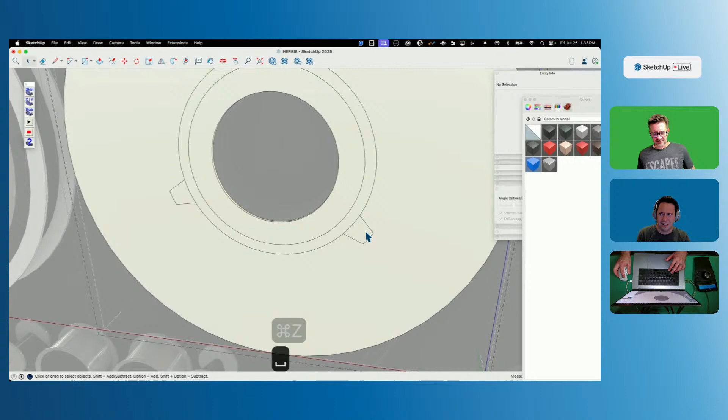So I might just try clicking there instead of the edges. Can you do the faces? No, that's the problem, I'm trying to create the face. Oh, I don't know what happened, but...

Here's what I'm going to do. I'm learning, you guys. It's taken many years, but rather than figuring out why something doesn't work, I'm just redoing it. Brian says we all know this frustration, lol. Yeah, all right, so there, let's see. That broke it, that broke it. So something about whatever was going on before it didn't like, but I'm not going to mess with it anymore.

All right, so the other thing that looks like is he does have, so this comes up a little bit, this ring raises up like that. This ring is actually a different color, a different material. I'm going to grab this material right here and put it on there. That's a little strong, so I will come in here.

Colin says, if the face is a smooth curve, would hidden geometry help? Hold on, I'm trying to process that, and I don't know that I fully understood what he was saying.

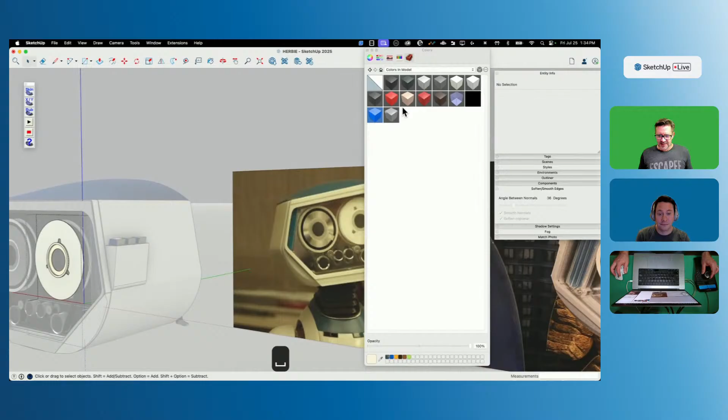If the face... what now? He says, if the face is a smooth curve, would hidden geometry help? Face is it? Oh, this? No, I don't. That's toggling hidden geometry on and off. So there's nothing else there. It's flat, I don't know.

Like I said, I don't have to care. I can let it go and walk away. See, I'm happy.

Then let's see if I can do this. I'm going to grab that, unselect that, and offset that like that. Then grab this line, follow it down to here. Something here, follow that down to, oops, too far. That's okay.

And then I should, well, I guess I can just do it again. I don't have to. I'm not, I know somebody said I should weld more at the beginning of the model, and you're probably right, because I keep ending up with these chunks to clean up, but it's obviously not something I did a very beautiful job of.

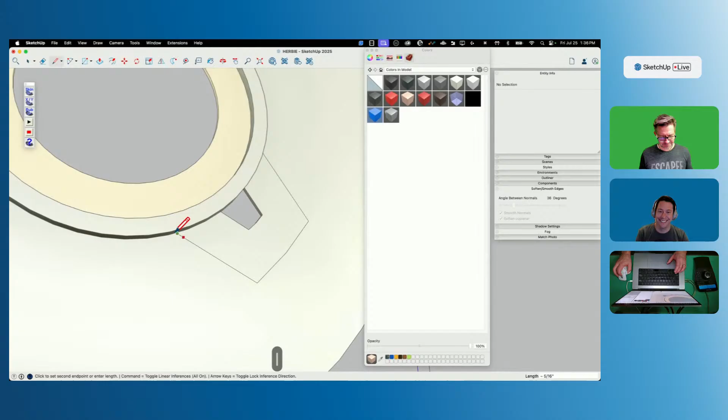All right, and then we're getting there. We're almost there, folks, one more edge here, and then I'll put this all in. This whole model's all in the details, right? Didn't break it. Didn't go far enough somewhere. Right there. There we go.

All right, there's that eye done. All right, 137. I'm just going to do this little neck piece, and then we are going to call it, mostly because I just think it looks like fun.

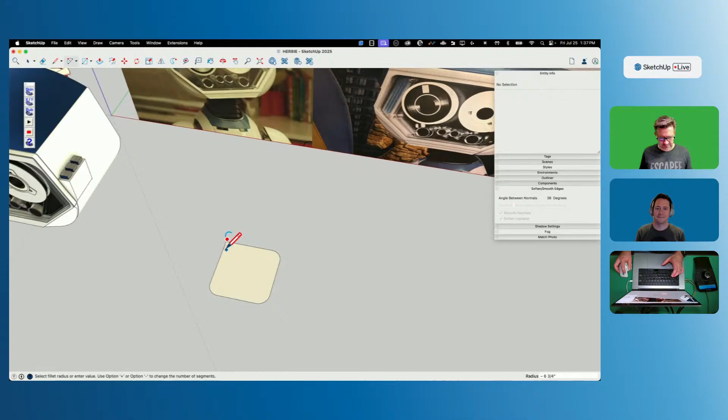So what we have here, I thought it was round, but it's actually like a square, accordion kind of thing. So I'm going to start with a square, draw a rectangle like that, knock off all the corners, and then draw this up like this.

Let's see, then what am I going to do? Follow me. Yes, at some point... okay, follow me, I will, was like, happen. Is that a... did you want that question answered? Pop quiz. No. That wasn't where I was going with that, but good answer. But you're right. Yeah, I was hoping it wasn't rhetorical.

All right, I'm just going to use that like that. Do one more. Okay. Then, little sound effects, and then I'm going to do that, do that, do that, do that. Double click, double click, double click.

That one I'm not worried about, that one I'm not worried about. I'm gonna take... oh, grab that. Oh, I missed a couple. Fortunately, I haven't drawn any other arcs, so I can still just double click.

All right, and then I'm going to grab it all, then deselect to get rid of that, so just the curve, because I'm going to right click and weld it, because you guys said I should. And then I'll put this black material on here. Weld this.

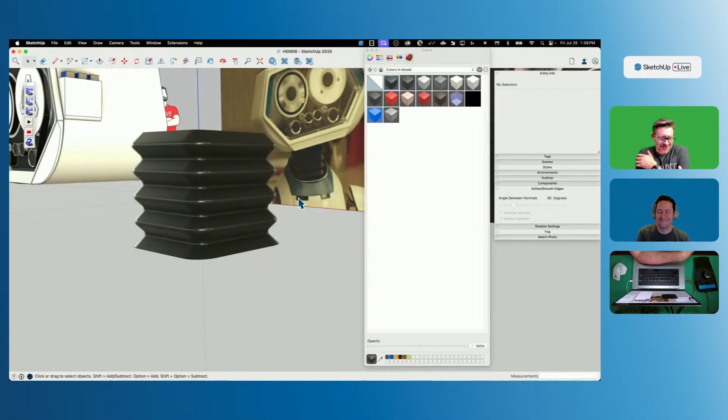And follow me. Nope, that's not follow me. One more time, follow me with this. Oh, wow. I'm just going to sit and look at the materiality of this real quick. Look at that, oh my gosh, look at that. And then look at that. Even got the peaking off those edges.

All right, I have no idea how this connects to his underneath his head because that was never shown. So I'm just going to line it up with the middle like that, pull it back like that, and then we'll look at size. Well, that's pretty close. That's not centered, is it? Is that centered?

There we go. Oh. All right. It's good, it's good. A little bit. Oh man, come on.

Pretty happy with what happened today. You're gonna make it all into a group. Yep, all right, put that right there.

Slide you guys, oh you're all locked. You can't unlock. We'll just kind of go back like here. We can lose the Aaron. We can take Herbie and put him in the middle.

Yeah, because if we're going to Aaron's scale, that'd be about a 12-foot tall head, right? That is a big Herbie. That's a lot of Herbie.

All right, I'm gonna go right here. This is totally unreasonable or unnecessary, but it'll make for a good thumbnail, right? Is that what you're going for? Very cool.

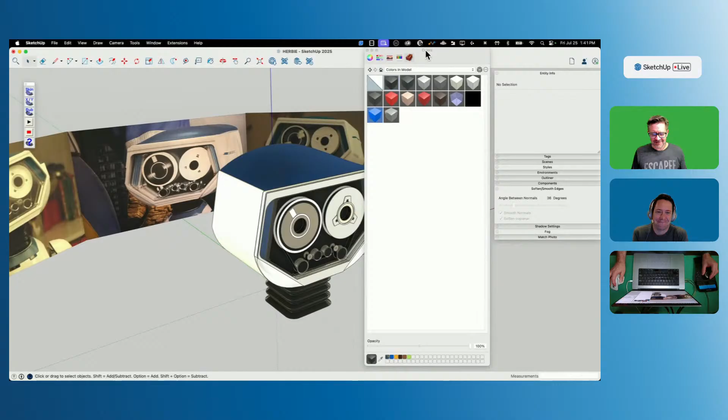Reflectivity on the glass, on the metal, on the plastic. Oh, so cool. Oh, look at his head, look at his head, look at that. Oh man, love it. Did you unhide the faceplate?

I don't think that, nope. Which means it's probably over here somewhere. Oh man, there's not a quick and easy way to put this back now that I did that. Oh, maybe? How close were you to being?

Nope, that wasn't right. That's the center. Vertically down to here. Okay, there, we're lined back up again.

All right, Command X, edit, paste in place. There we go.

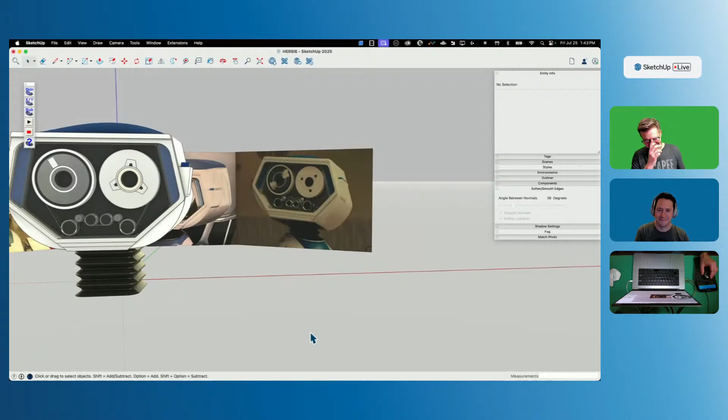Oh, that turned out very cool. I love it. Very proud of your work, Aaron. That's amazing, looks good. Oh, that was cool. That was fun, that was a lot of fun.

Yeah, I think there's still some spots I want to go. I would, I don't know, maybe I don't know if I'll go work on it somewhere. This might be done for me. I'm tired, but that turned out pretty cool. I like it, I like it a lot.

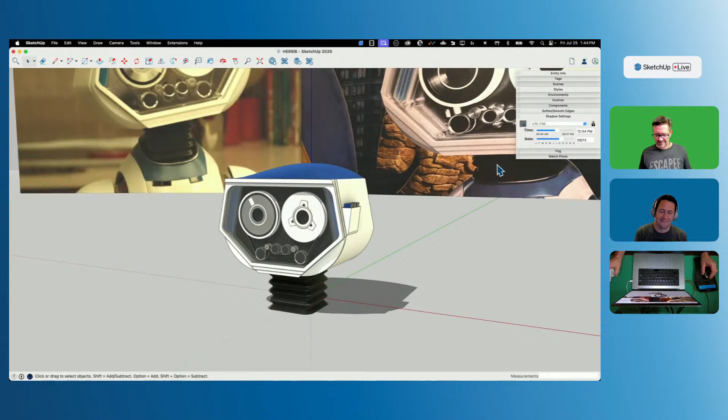Pretty cool, awesome. Hey, thanks for hanging out with us, everybody. That was a fun one. I'll be honest, when I first looked at this, I went, whoa, I don't know how to do that. Like I was not sure how that was all going to come together.

So I'm very glad that we ended up with what we did, because that looks pretty sweet. That's cool. Yeah, there's your popcorn bucket right there. Just open the lid there. That's it, yeah. Yeah, that'd be perfect. This would just grab that right between your legs, a little handle there to hold on to, and then all this is popcorn space.